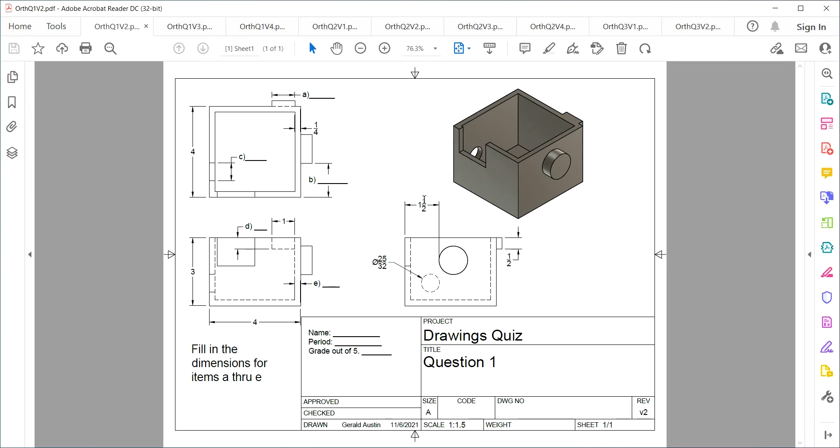However, this object line represents this circle that we can view if we're looking over here from the right side. So the dimension from the front corner right here back to the front edge of that circle right here is 0.5 inches. So hopefully that gives you a little bit of an understanding of what you would need to do when you answer these questions. Okay, I'm not going to go through every one of them, and there are different views, different numbers on them. But we're going to go on to the next question.

This question right here requires you to identify each edge shown in the isometric view on at least one of the orthographic views. And then number 2, draw the dimensions shown in one view on at least one other view. So all you have to do is pick the edges out and find a view that represents that edge. Okay. So we'll call this our front view right now, again for the sake of communication, which is going to be this surface right here.

So there I am, edge A. If I was standing right here where the cursor is at, looking this direction, what I would see is this view right here. Therefore, edge A is right here. If I was looking from the bottom of the piece, up here looking up, since this is the front, this is the top, this is the bottom, then edge C is going to be right here. Okay.

This edge right here, the dotted line going across, which is a hidden line in the isometric view, it's going to be this line right here. Or it could also be this line up here. It could also be this line right here. This face right here is this face right here. This rectangle right here is this rectangle up here. So this is my front view, this is my top view, this is my side view.

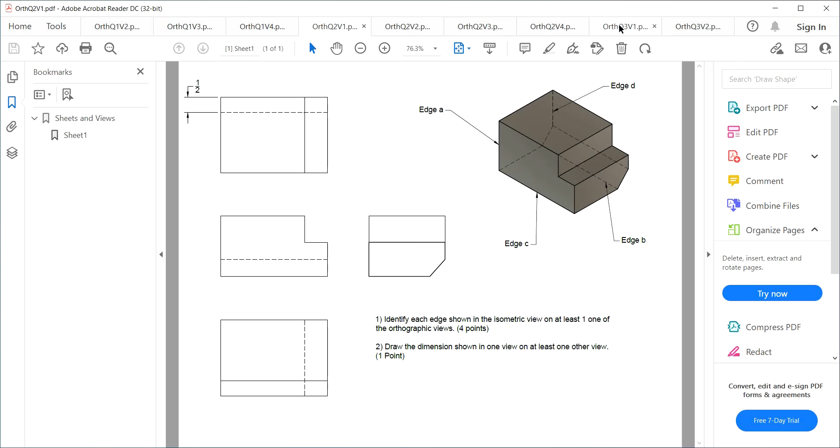And then for question 3, we've got a small fabricated item with some welding symbols on it and just a couple of dimensions. And what I want you to do is draw or shade in the weld for number 1, wherever this weld is shown. But I want you to put that weld on another view. So that weld could show up in one of these other two views. I don't want you to put a welding symbol for it. You can just pencil it in, draw where the weld is going to go.

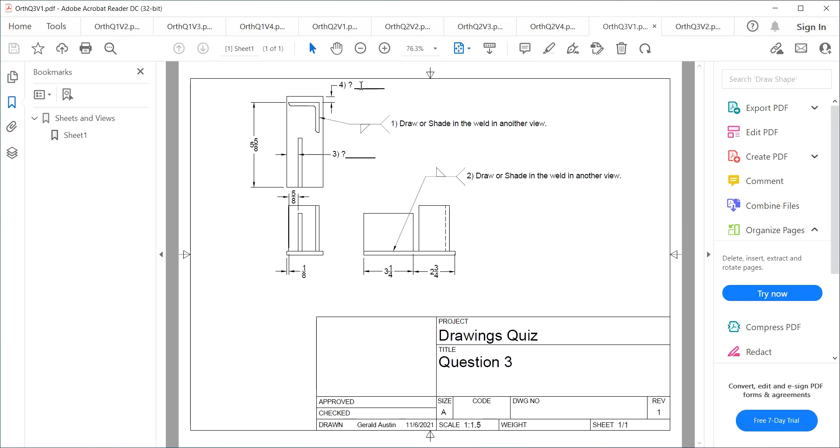Same thing goes for number 2. Draw or shade in the weld in another view. So this weld would show on one of these other pieces. Number 3 is going to be fill in the dimensions. The dimension's shown somewhere else, or you may have to do a little math and figure out what this dimension number 3 is. Same thing goes for dimension number 4. And again, a couple other versions of that. Hopefully that helps you out just a little bit. I'll open up one of the drawings.

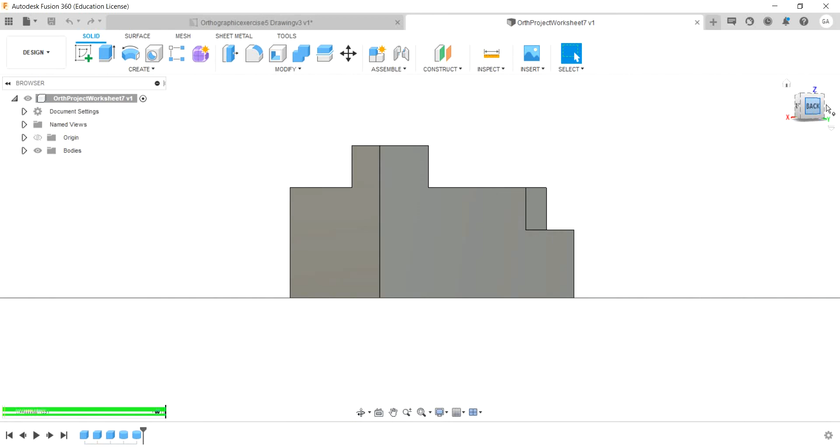So anyway, here's a 3D object, a solid object. My front view is going to look like this. My right side looks like that. My back side looks like that. Back around to the left side. Here we are to the front. Again, there's my isometric view that we're going to use in most cases.

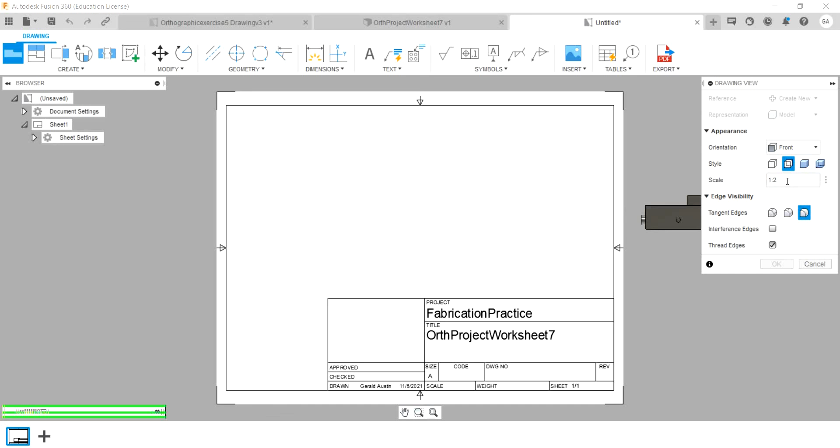So what I'm going to do is I'm going to go ahead and make a drawing so you can see how this drawing develops and see if that will help you. We're going to go ahead and put our front view in first. I'm going to change the scale to 1 to 1.5. I'm going to go ahead and remove all this title block stuff just so you can see how all these views are related to each other. Put this kind of in the middle.

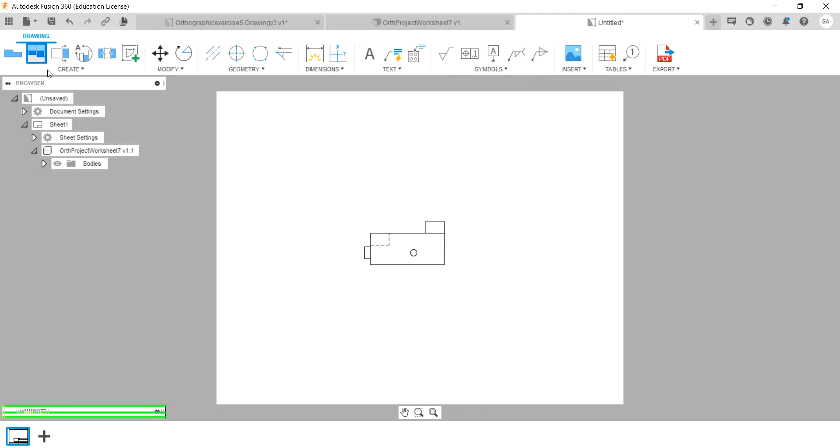So we're going to call this my front view. I'm going to add another view. That's my parent. If I go up, we'll call that the top view. We'll go down here, it's going to be the bottom view. We'll go over here, it's going to be the left side view. Go over here, it's going to be the right side view. I'll go ahead and put in one isometric view. Let's look at the way that we showed it in the model.

So in most cases, you don't need this many views to get all of the information that you need about an object. It depends on how complicated the object is. In this case, we've got a pretty simple object, except there are a few details on it. But having that understanding of where these edges line up, again, if I was to draw a straight line from this hidden line straight up to here, it lines up with that hole. Straight up there, it lines up with that hole.

Okay. Now, there are a few occasions when people make a drawing where they will have a front view and they make a side view and they'll put it in a different location on the drawing. Or sometimes they'll do a cut section view where you actually cut a piece of it out. Or they'll make what's called a detail view. So we'll go ahead and insert a view that is a detail.

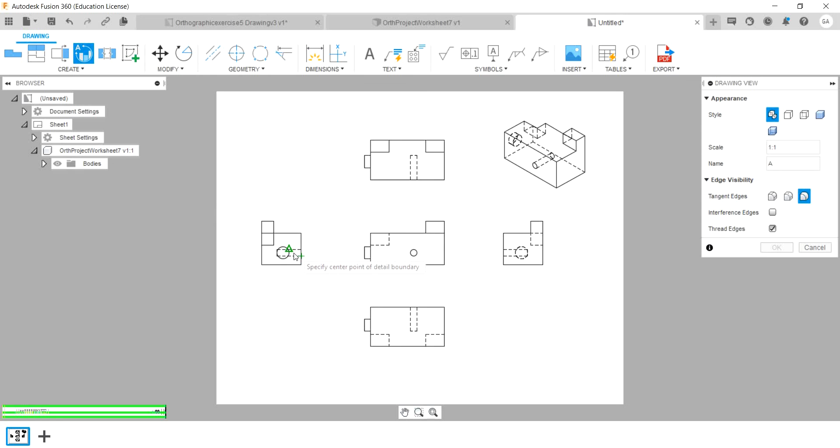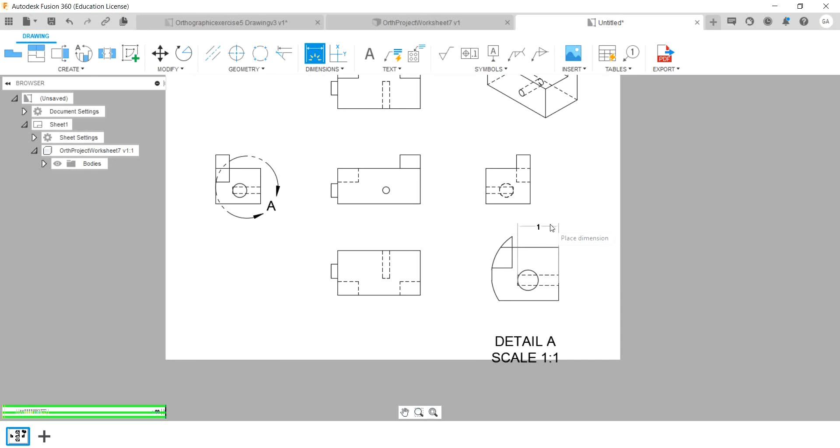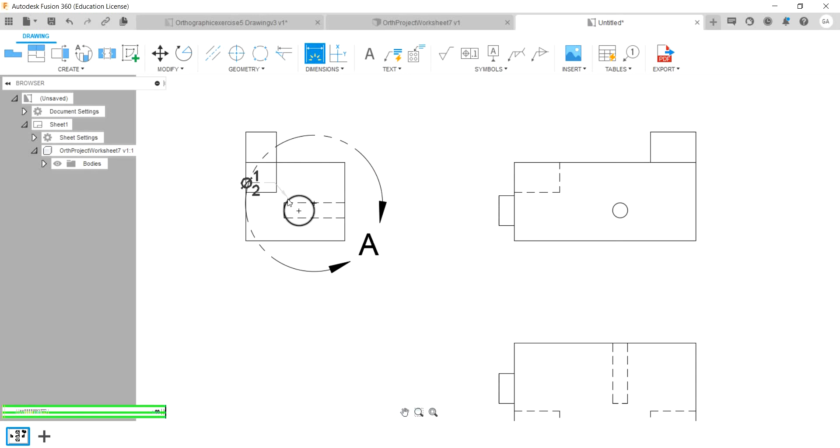So there's a blown up detail of what I've got inside this circle right here. And it's been properly scaled. If I was to put some dimensions on it, the way that it's annotated or shown is this text down here says detail A, scale 1 to 1. So this actual part here is full scale. This drawing is 1 to 1.5. But you'll notice there's my 1 inch dimension there. If I was to draw the dimension over here, it's also going to be 1 inch. So that's one type of auxiliary view besides your regular orthographic projection.

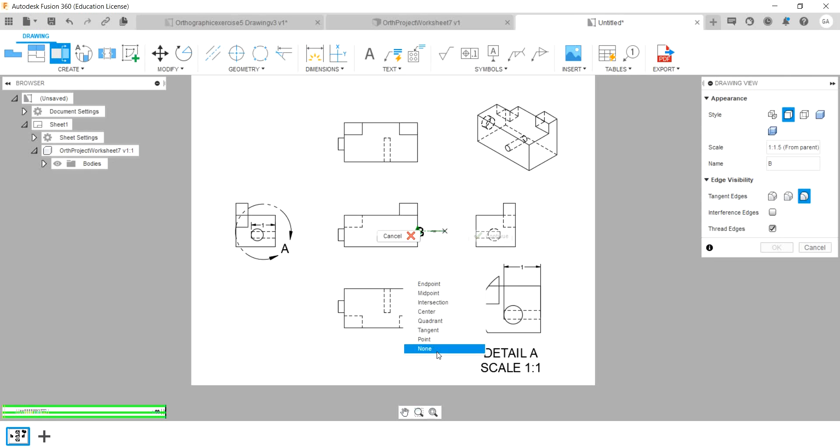Here we're going to do what's called a section view. So I'm going to select the section view tool here, just to show you how to. You can go right here, you can go right here. We're going to pick which way it's looking. So if my arrows point that way, I'm looking in that direction. My arrows point that way, I'm looking in that direction. We're going to put the arrows in this way. And we'll put the view over here.

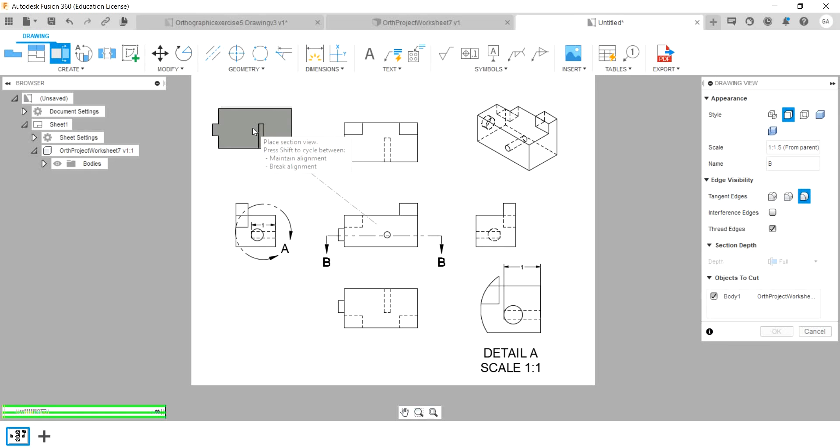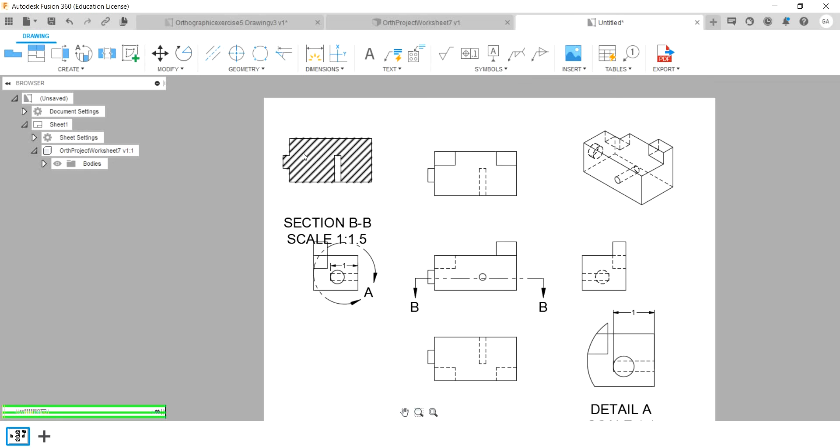So if you notice, this view looks a lot like this view, except this hidden line is now solid. The other hidden lines are hidden, they're not shown. The reason for that is in a section view, the cut section is what's visible. So these lines here, these diagonal lines, represent a solid surface. That's an example of a section view and a detail view.

And hopefully that helps you a little bit. If you made it this far, it's good that you're interested. Again, as a welder, sometimes this may come in handy, sometimes it may not. But having some understanding of orthographic projection, reading drawings, understanding how the drawings work, is a pretty good skill to have overall, I think.

There's much more to it than what we've touched on, and we're going to go into it a little bit deeper. We'll start talking about title blocks and scaling the drawing maybe, and maybe try to do a little bit more fabrication of something. The project that you guys did last week where you took the pieces, we're probably going to do something different. I'm trying to come up with something that's practical that we can build.